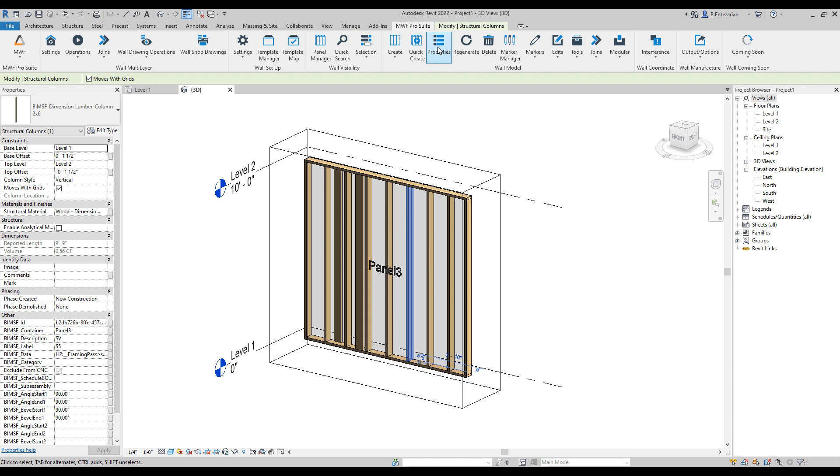Now I'm going to select the panel and I'm going to click on panel properties. In the miscellaneous tab, we need to open hole series. In here, I'm going to add two types of holes. One of them is a rectangular hole. I'm going to name it REC01. If you're using CNC machines, you can add a CNC operation code. Other than that, you don't need to.

I'm going to add this type of hole and edit shape. I'm going to keep 1 inch of width and 1 inch of height. Okay, the other one is a round hole. I will name it R01 and add. I will select the second one in edit shape. I will change the diameter to 1 inch.

Now we need to go to vertical spaced. The first panel hole series that I'm going to add is with 6 inches for the start offset. The justification is from the top, and the spacing I will change to 2 feet. And the hole series will be the rectangular type. I will add the edge clearance as 2 feet and the depth offset as 1/2 inch. And I'm gonna add it. I won't check off any of these options.

The second one, I will check off these two, and I will not add any edge clearances, and the depth offset will be 3 inches. I will change the hole type to R01 as a round hole series and the spacing as 2 feet like the other one. I'm gonna add it.

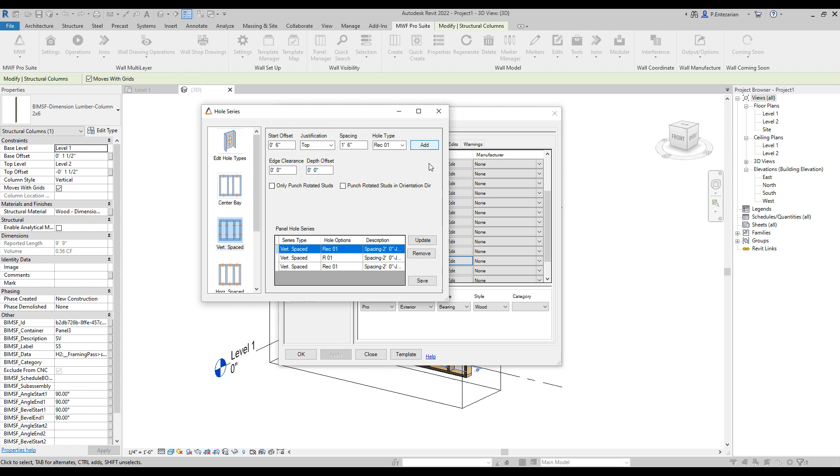And the third one that we are going to add will have 3 feet of edge clearances, and the depth offset will be -3 inches. The start offset will be the same. We'll change the spacing to 2 feet as well. I'm going to check off these two and add. Let's say save, OK, and let's see. As you can see, holes are generated on the panel.

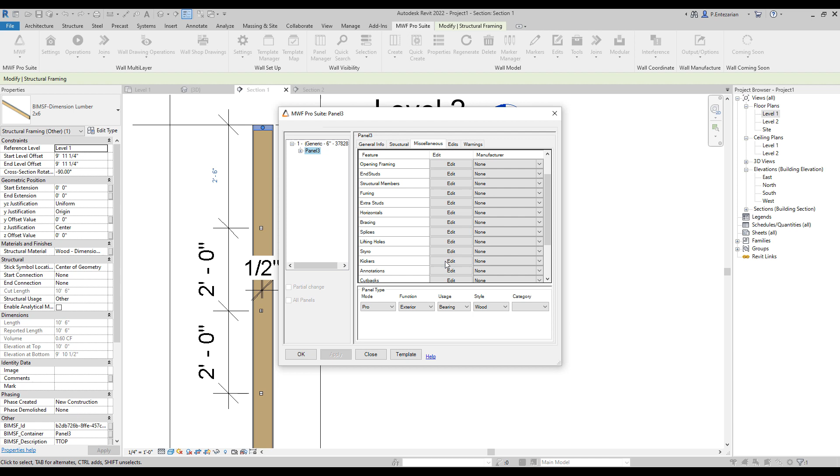I've added 2 section lines just to check the dimensions. In here, I'm going to select the panel, and in panel properties we are going to see the hole series settings that we have added for the panel. In vertical spaced, this is the first one that we have added, which is a rectangular hole. The start offset is 6 inches and the spacings are 2 feet. You can see that we are having the 2 feet spacings in here.

But we have also added edge clearances. And that's why the first hole that should get generated 6 inches from the top is getting deleted, because we have added 2 feet as the edge clearance. It means that in the first 2 feet of the panel from the top, no hole series should get generated.

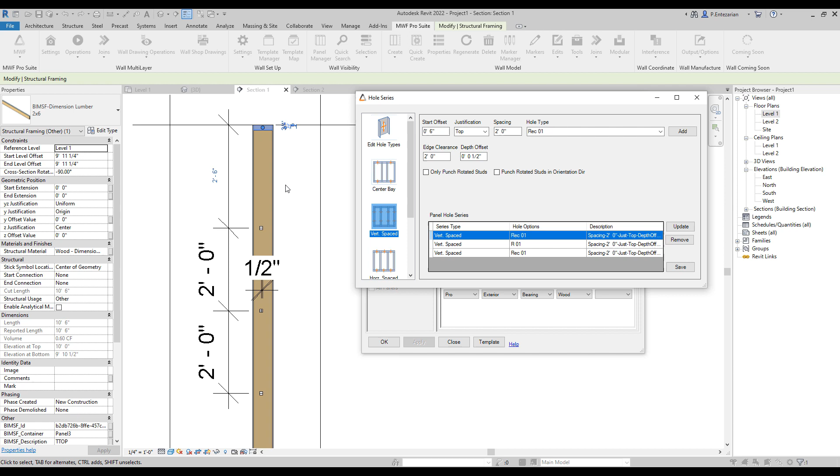Now let's check the other section and check the hole series for the rotated stud. I'm going to select the panel and go to panel properties, miscellaneous tab, hole series, and let's check the second panel hole series, as it's a round hole. We haven't added any edge clearance, and that's why we are getting the first one generated 6 inches from the top of the panel, as we have set the start offset as 6 inches. The spacing is 2 feet and the hole type is R01, which was the round hole.

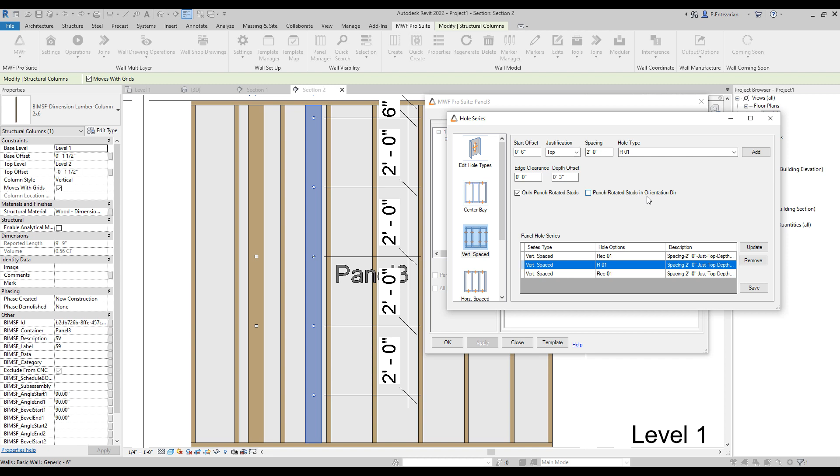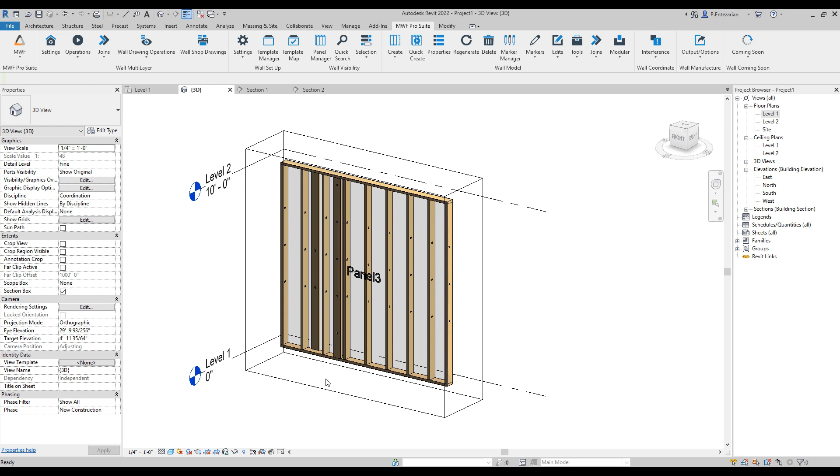We have also added 3 inches of depth, and the reason for that is because the extra stud that we have added is on finish face interior. I've also checked off these two options. I'm gonna uncheck the second one, which is punch rotated studs in orientation, and I will say update, save, and OK, just to see what will happen. As you can see, the direction of the hole has changed. I'm going to go to the 3D view, and you can see the results for this one. I will undo and go back to that section.

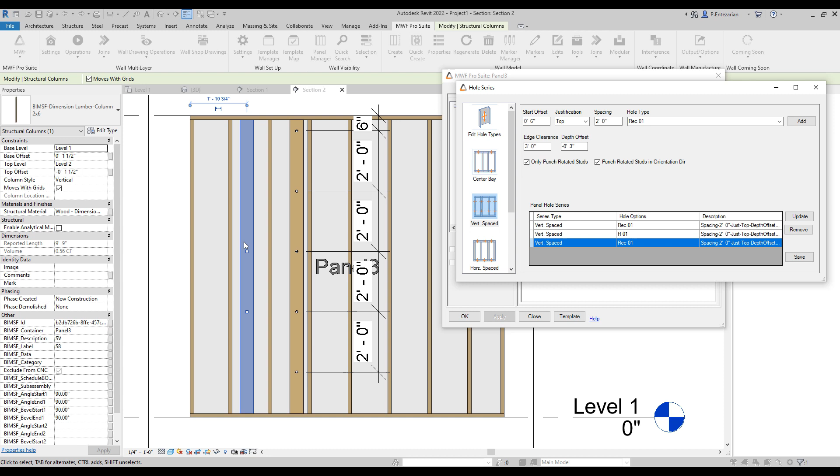And the last thing that we are going to check is the other extra stud, which is on finish face exterior. I'm going to select the panel and go to panel properties and miscellaneous tab. I will find hole series, and in vertical spaced I will select the third one. You can see that the edge clearance here is 3 feet. That's why we are not getting the first two. The other settings are the same as the other hole series, and we need to add -3 inches as the depth offset because the extra stud is on finish face exterior. I've also checked off only punch rotated studs option.